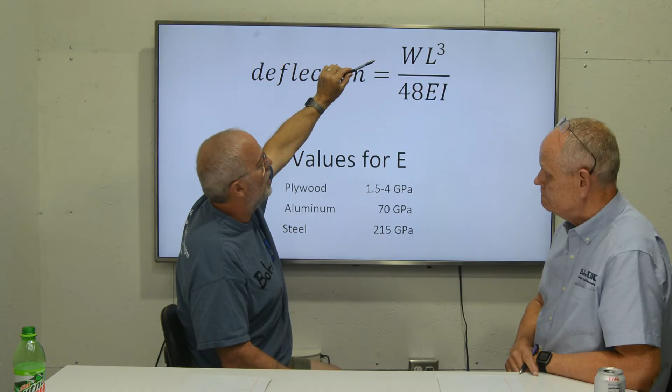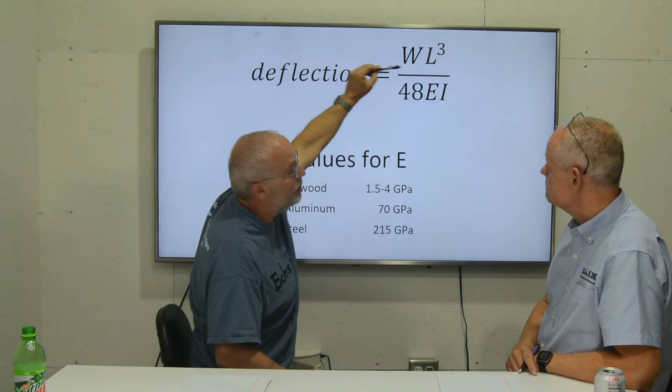You'll notice on our E3 and our E4 that we have supports about every 4 inches. That's to make L small, because in this equation, these numbers on top we want to keep small. The smaller they get, the smaller the deflection. And if you remember your fraction math, if this number on the bottom gets large, that number also gets smaller. Weight we want to be small, so if it's less load, you're going to have less deflection.

Or if you can support that beam all the way along, and some CNCs actually have fully supported beams, not this equation, you keep L small. And then on the bottom you have this E, which is Young's modulus. We want that to be large. Okay. Yeah, so I'm going to act like I understand what he's talking about.

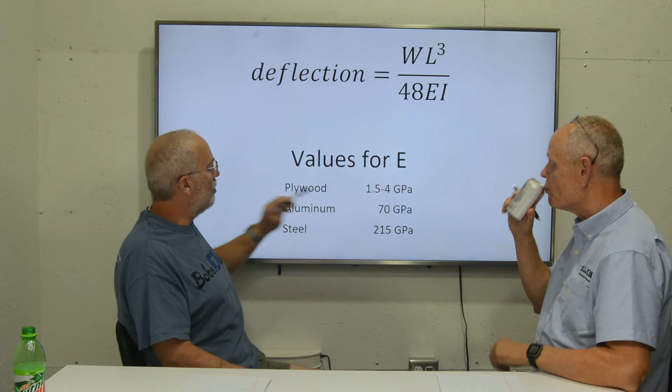Here's some values for Young's modulus, or what we call E in the engineering world. Plywood, 1.5 to 4, average of 2 maybe. Aluminum, 70, so it's stiffer than that. And then steel is 215, or 215 gigapascal, so it's maybe 100 times stiffer than plywood. So if you're going to make a machine and you want it to be rigid or stiff, then by all means go to steel, voila, you're done.

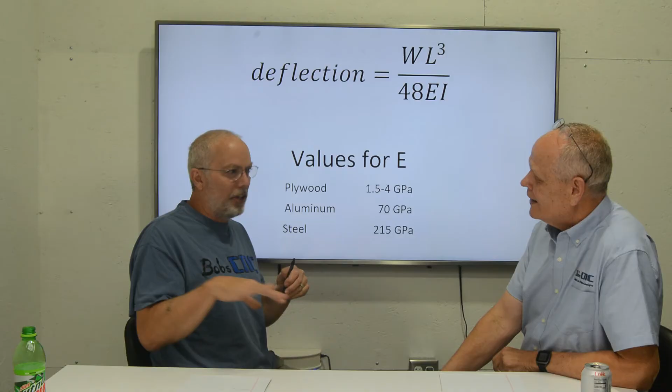However, there's this other thing called I, and that's the beauty for me of engineering, because I gives me the opportunity. What is I? Good question. Right on cue. I is geometry. Oh, jeez. Not the geometry with proofs in class. The shape of an object. So maybe that would be a better way of saying it.

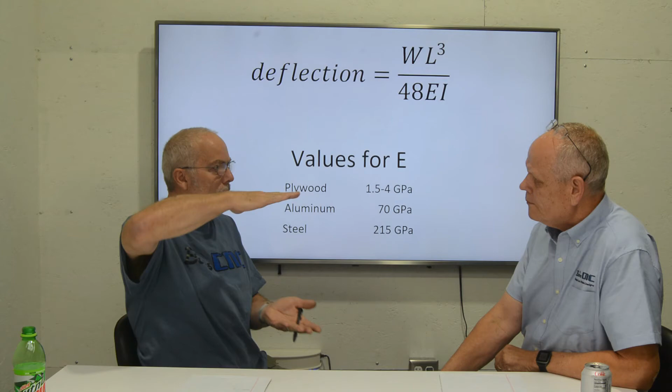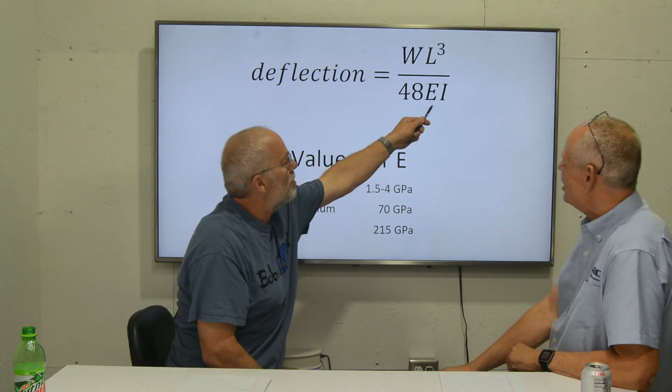So you've seen an I-beam, right? You just take a long skinny member and you stick a top and a bottom on it. That top and bottom make it tremendously more rigid than it would be without them. I can show you the math of that. It's 1/12 base times height cubed. I don't want to hear it. Oh, come on. But anyway, the bottom line is you can make I really big.

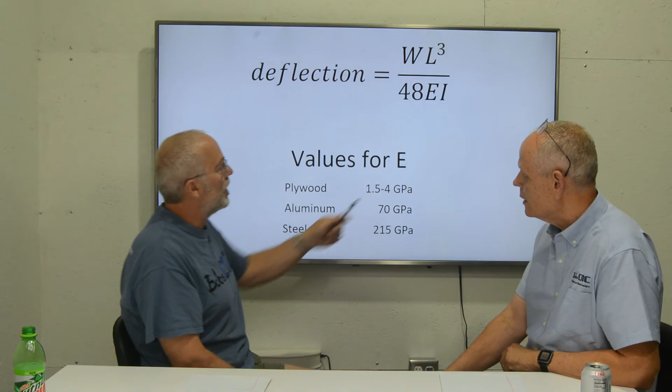You can't change steel, you can't change aluminum, and you can't change plywood, even though it has a range depending on the plywood. But what you can do in the design, which is what I love to do, is change the I. So with plywood, adding like the box beam construction to stiffen everything up. Absolutely. Putting the support where you need it, so that I is big, and if I is big, deflection is small. It has just as much value as steel. If I have geometry that's 100 times stiffer, I can use plywood and it will be as rigid as steel.

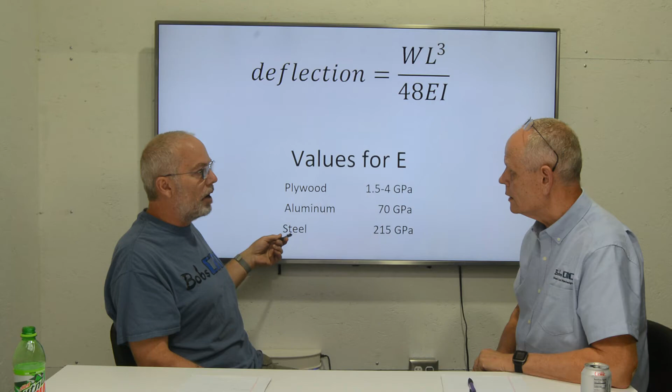Now, you would say, well, wait a minute, what if your designs were exactly the same? If your geometry or the shape that you made was exactly the same, then steel would be roughly 100 times stiffer than the plywood, right? If it was 2, and this was 200, right? So yeah, but that's not the case, right? The case is, for me, design matters.

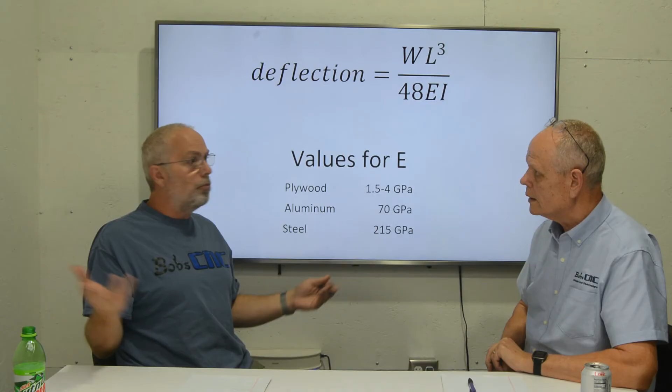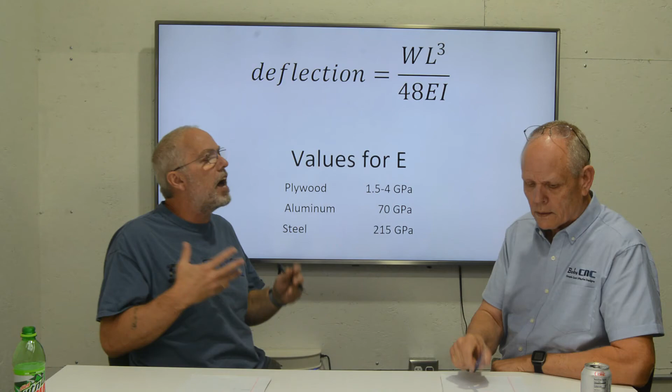Yeah, material properties are important, and you can gain a lot, but you can also gain a lot by the I. And so, what is BobsCNC all about? Simple, cost-effective design. Let's use a material that we can work with. It's easy to manufacture, that our woodworking fans will love, because they can modify it because it's wood and that's the tools that they have. And so what we have to do, we have to make I big.

Now, I want to be clear, and we tell this to our customers all the time. If you're looking for a production machine, move along. You don't want an E3, E4, or KL7 series, right? It is not made for production. If you're looking for a production machine, I would recommend that you start at somewhere around 5,000. That probably won't do it. Probably want to get into the $10,000 to $50,000 for a CNC router that will do production stuff. However, if you don't need to crank one out every 15 minutes or every 15 seconds, depending on the part.

So by production, all you're saying is you've got a machine that is so rigidly designed you can push that router through the material. This can be bigger. Okay. The weight, the load that you can put on it. Right? With ours, if you keep it within the parameters of what we recommend, I tell people to start off with 20 to 25 inches per minute with a plunge of about 8 to 12 inches per minute, and then let's do a max depth of cut of 1/16 of an inch or a little bit more, maybe 0.08 inches. You're going to be fine. Your machine is designed so that deflection is small enough, within a few thousandths, so that your projects are going to turn out really nice.

So you're saying that when we cut within the parameters, the speed and feed that the machine is designed for, that it'll hold what, about 5 thousandths? Yeah, it would do that. Yeah, for a well-maintained belt machine, sure. Okay, now that being the case, from a woodworking point of view, and this is the thing that I wanted people to understand, is that we're not claiming to be Mazak and we're not claiming to be Bridgeport, but we're saying that in the woodworking world, if you're holding 5 thousandths, dude, you're golden.